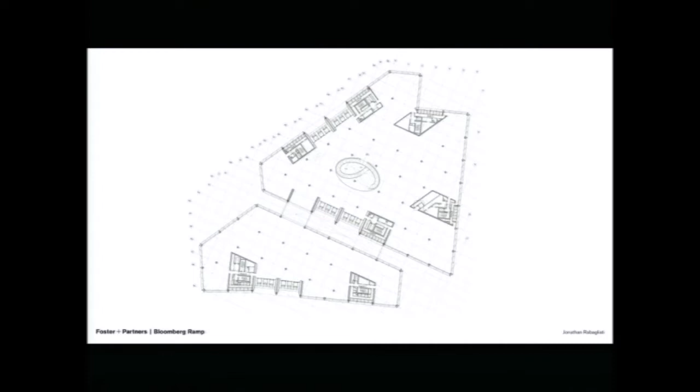Now there's two buildings, a north and a south, and the ramp sits right in the heart of the north building. And this gives you a sense of what it is. It's unique in the sense that on each flight it goes off in a different direction. So it's only by going up 3 flights that it actually returns to the same plan curve. And what you notice as well is that every landing, it's one continuous curvature going all the way up from level 2 right up to level 8.

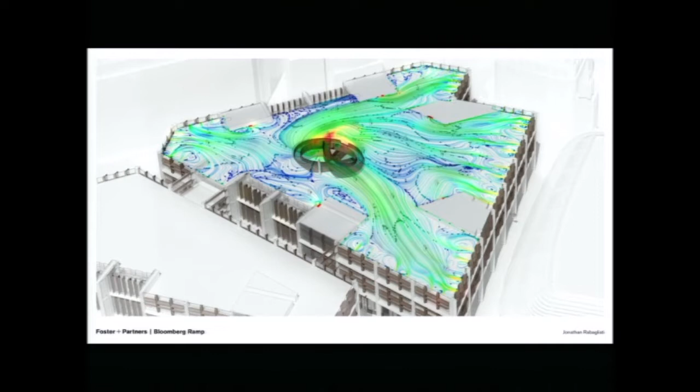And as well as having a function of enabling people to move up and down the building in space, it also is an opportunity in terms of the passive ventilation strategy. The air coming in goes up through the ramp, through the atrium, out of the skylight above.

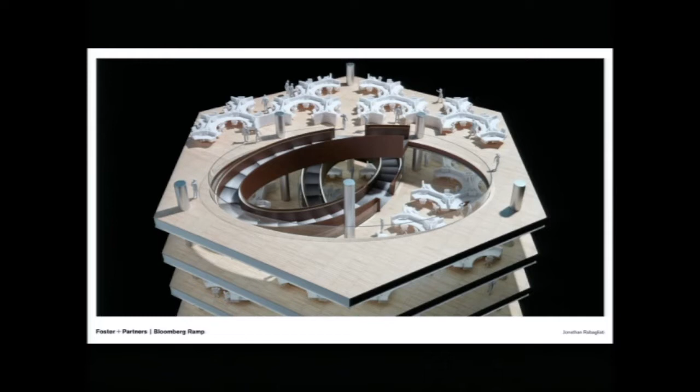And you can see here the relationship between the ramp and the atrium. The atriums hug the ramp, but then open out, so that in terms of the total floor plan of the ramp, the atriums are much smaller per floor, but they rotate 120 degrees each flight as they go up. And then you get to this space which Bloomberg calls the pantry, which is a double height space. And the ramp literally flies out, and a bridge comes across to meet it where the landing is.

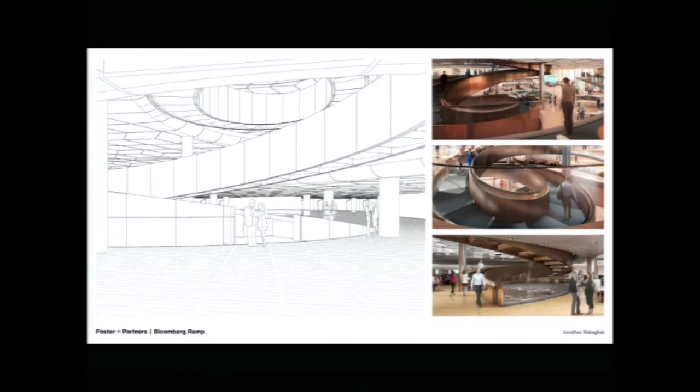And you see the ongoing process in design of the visualizations and the dialogue with the client to really communicate what is actually quite a difficult three-dimensional form to get your head around. This is an animation that I created from the parametric model, and it really shows the versatility of the parametric model, where every frame of this animation is actually a fully detailed 3D surface model of all the cladding of the geometry.

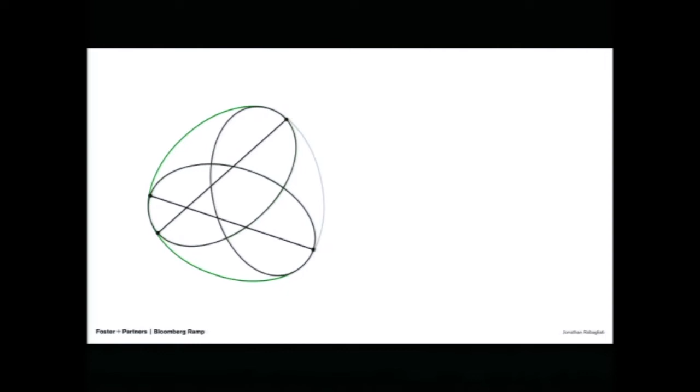And this is actually where I started on the project. So this is 2012, and it's something that really bugged me. I was looking at this and thinking, this isn't right. I don't know what you think about this curvature, but it bugged me. And just to explain what it is, this is 3 ellipses that are tangent together. And what bugged me is that if you draw the central axis of these ellipses, the point of the tightest curvature, you add the second one and the third one, and then you take away the rest. You see that on each leaf, as it were, of the ramp, you've got these 2 points where the curvature is tightest.

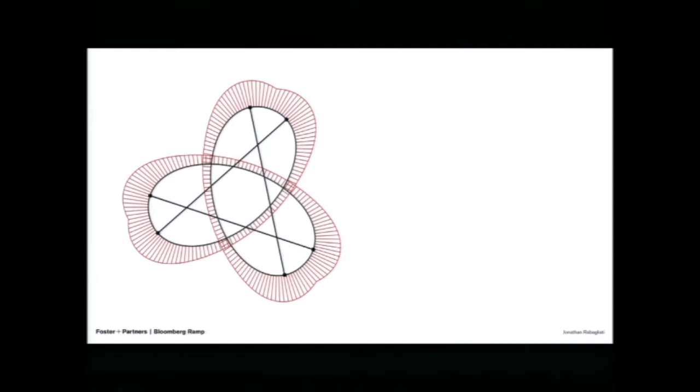And actually, I wanted to define something that was one continuous curve, where as you're walking around, it gets tighter, tighter, tighter, and then opens out again. You don't get these 2 inflection points. So I managed to move from this, which is also the geometry of the skylight above, to this, and this gave me a sigh of relief that I'd got something that I was happy with.

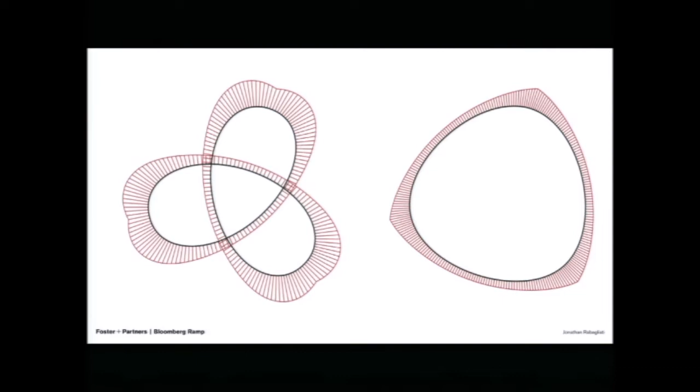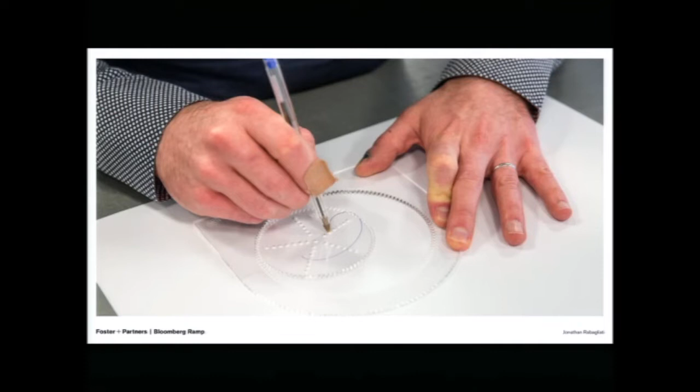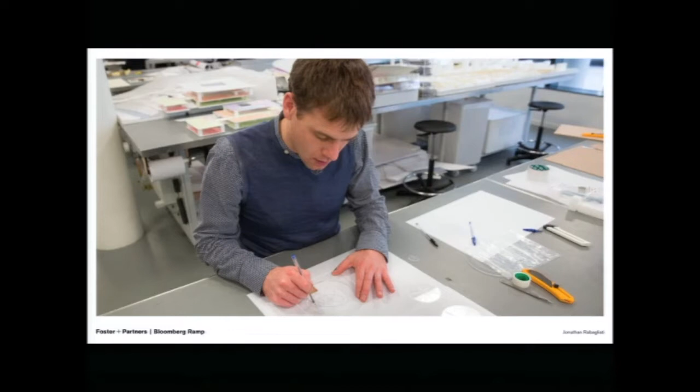Now, actually, this journey was a journey through mathematics, and this is the equation of a hypotrochoid, which is what the ramp is, and the hypotrochoid also defines the skylight above. Now, the mathematical equation might not be familiar to you, but those who grew up in the 60s or 70s are probably familiar with the spirograph, and it's really just a process of rolling one circle around another, and you switch disks, and then you can draw the skylight. And this animation, again, is just a way of explaining that it's starting off with just rolling a circle along a straight line.

So this is a trochoid that it's drawing, and each time the arm of the circle is getting longer and longer until the point where you start bending that line into an arc and gradually curving it around until we finally get to the form, which is the kind of setting out geometry of the ramp.

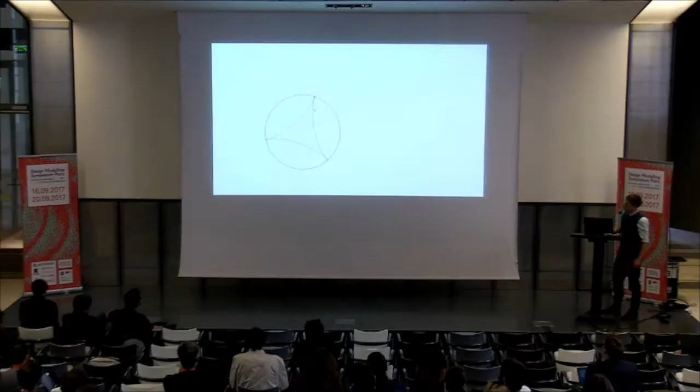But then going beyond that, actually, the relationship between the skylight and the ramp, which are both formed from this same approach to curvature. So that's the skylight and the atrium around the top, around the outside, and then the ramp that draws itself up the center. So that's level 2 right up to level 8, and again all those frames are coming straight from the parametric model.

So this is where I started. This is 2012, and what I'd learned from previous projects is it's the collaborative relationships, and it's that kind of workflow and building between disciplines that's key. And so when I started out, Foster's didn't have a parametric model of this, so I rang up AKT, who are the structural engineers, and said, have you got a parametric model? And they said, yes. So I said, can you send it to me? So this is what I got.

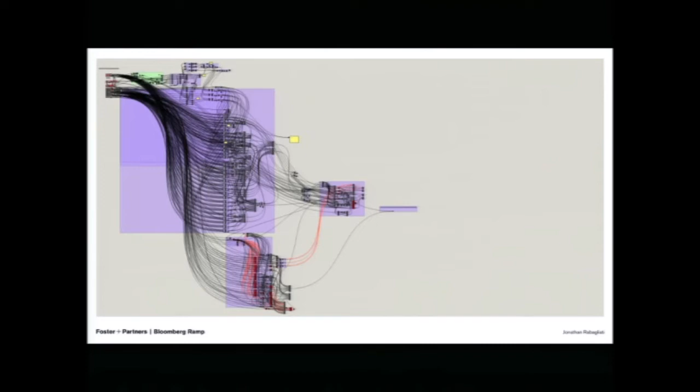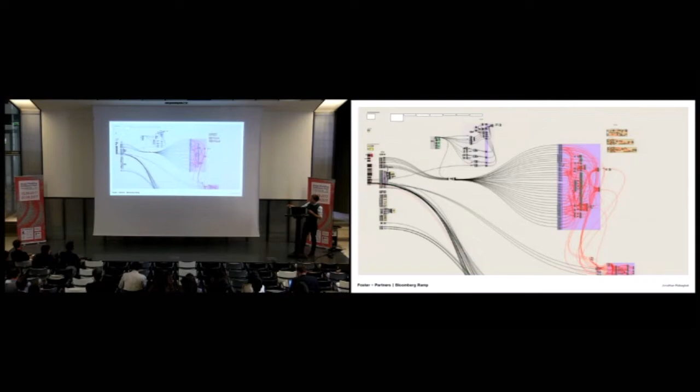And this is basically all the variables on the left, all the parameters, and this top bit was defining the cladding. So this was the part that was owned by me, and the bottom bit was defining the steel structure, which was the domain of AKT. And what you can see here is that the logos of AKT and Foster's actually appeared in the script or in the definition.

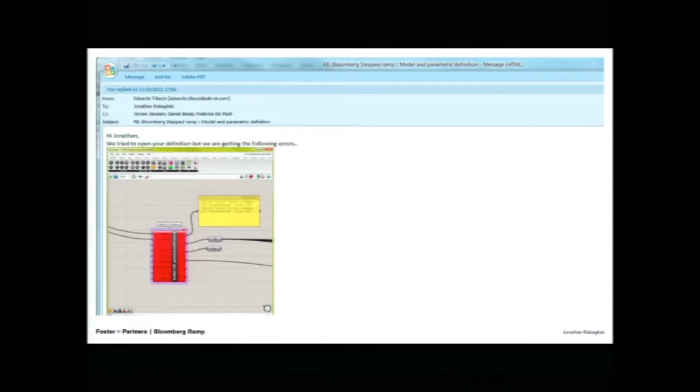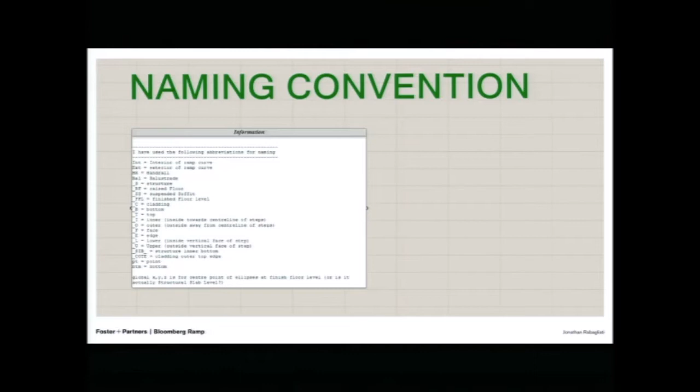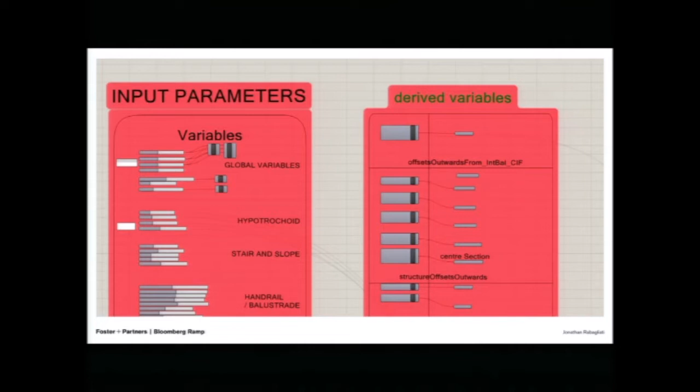But it's this process of collaborating. You see this email from 2012, almost exactly 5 years ago: we tried to open your definition, but we're getting the following errors, which next day was, we tried a different version, and we still get an error. But that process of collaborating is about defining naming conventions. It's agreeing parameters. They were using VB scripting within Grasshopper, so I adopted VB so we could have a common language. And it's really this element of trust. It's this level of skill and dialogue, as well as this rigor of approach.

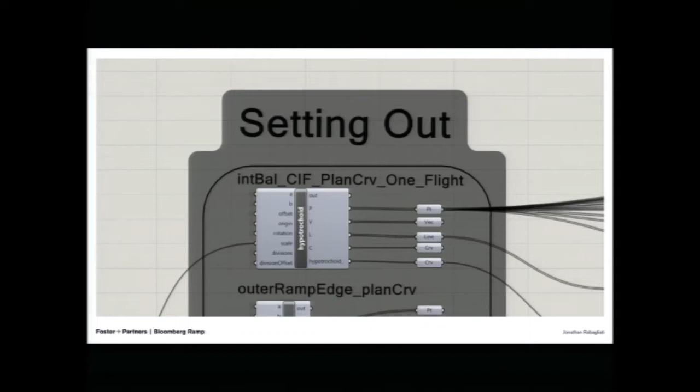So going through there, go right to the middle, and you see the hypotrochoid, which everything is coming out of. And actually, that change in the geometry was facilitated by this magical moment in Grasshopper where you take something out of one thing and plug it back into another. But because their structural model was actually built in the same definition, I could change the geometry, and all their model would update instantly.

So what happened was, rather than spending 3 weeks having coordination meetings updating their model, their model was already built into the analysis model. So that's their analysis, and instead of wasting that time on coordination, they were able to invest it in an exploration in dynamic response factors. So they tested all 96 steps as they're excited, read the results over the full height of the ramp, created a matrix of data that could be processed and analyzed, interrogated the results, and actually got some surprising peak response levels in unexpected places.

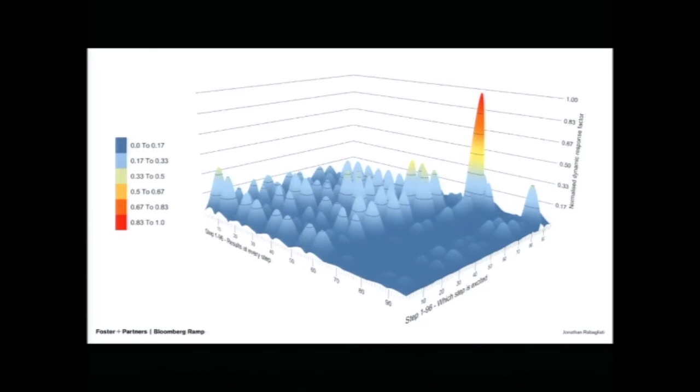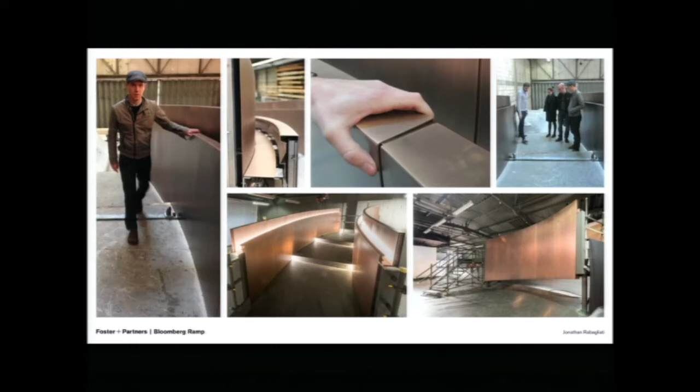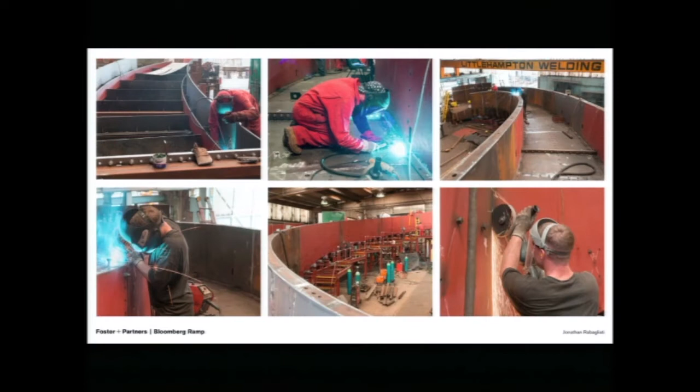Now, while this was going on, the 3D one-to-one prototypes were being made to test the fabricator's capability. These guys in Germany didn't manage to pull it off, so the panels were then commissioned from a company in Japan. And while that was going on, they were already going ahead fabricating the steel. So this is in Littlehampton Welding in the south of England, and you can see literally the scale of this thing. It's vast, and every time we saw the mock-up, we saw this.

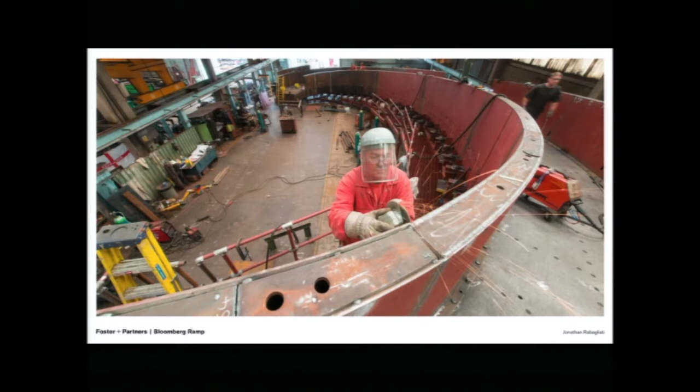You design something, but you're completely taken back by the scale of the thing. And you can see this isn't digitally manufactured in a fab lab. This is men with steel and angle grinders and everything. So this is

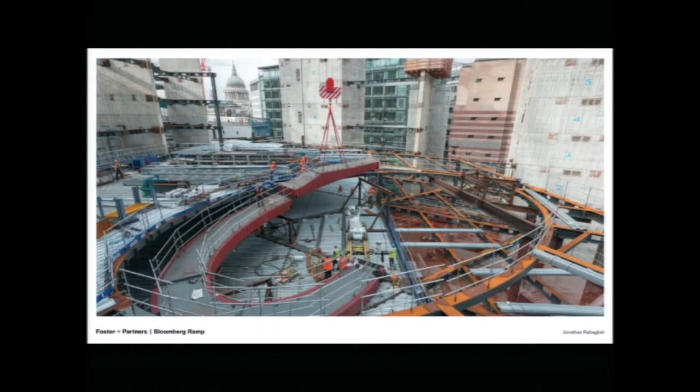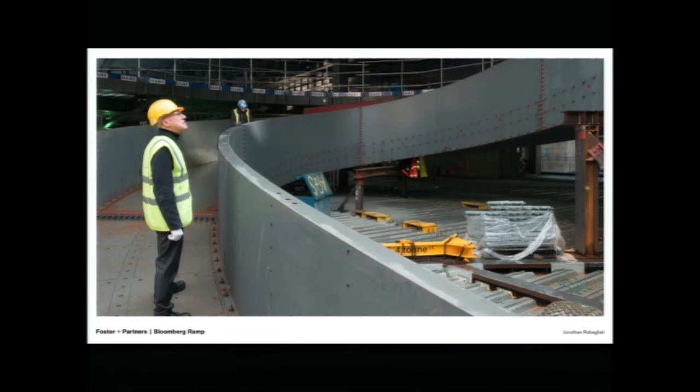2014, yes. So you can see that's where the ramp's going, right in the middle, and it comes onto site, and you can see St Paul's Cathedral just overlooking the building site. Because it's bounded by the City of London, there's nowhere to store this, so the ramp structure was stored in situ, and gradually it went up floor by floor. And you can see Norman came along to keep an eye on the proceedings.

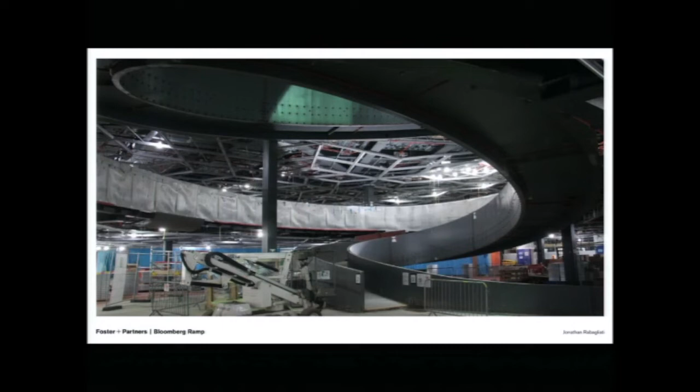And here you see that 120 degree twist as it goes up. So literally, as the building was built, the ramp came along and was propped up on these goalposts, as you see. And then once the floors had been finished and the concrete poured and the rest of the building settled, then it was actually bolted into the superstructure. So that's where it starts in level 2, going up to this double height space and up into the skylight above. So in terms of sharing data and logics with the structural engineers, AKT, we actually shared that parametric definition.

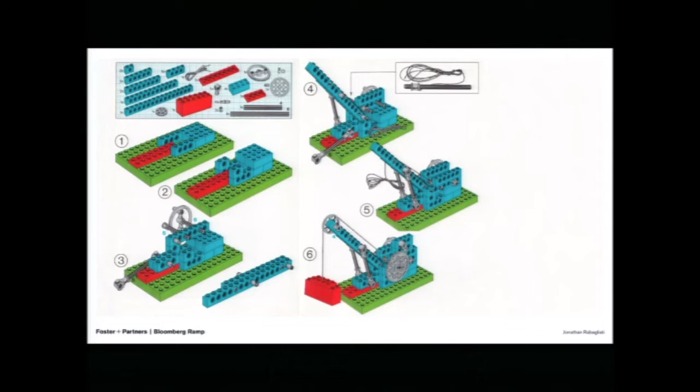Now, in terms of sharing data with the contractors, we used this approach, which is the kind of Lego instructions. So what we did is we encapsulated all the geometry, and because it's defined by a series of mathematical equations, we could do that. And so this is the list of all the parameters for the whole ramp. And then we had literally, I think there were 93 steps that we could go through with a series of checking points.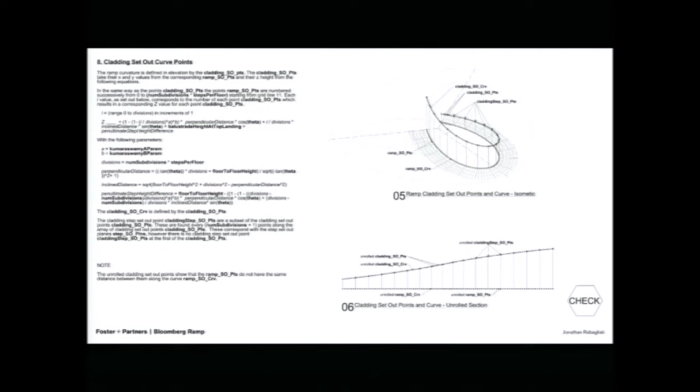And the other thing, I've talked about the plan curve, but here, this is the curve in profile. And again, I turned to mathematical equations, but didn't just rely on the maths per se; we put it into the VR because we wanted something that wasn't mathematically optimized, but that worked optically. So you can see here, you've got the landing. In this case, the curve of the handrail actually just travels right through where the landing is.

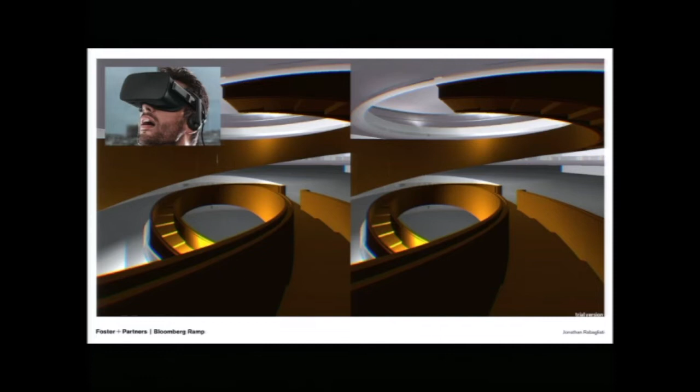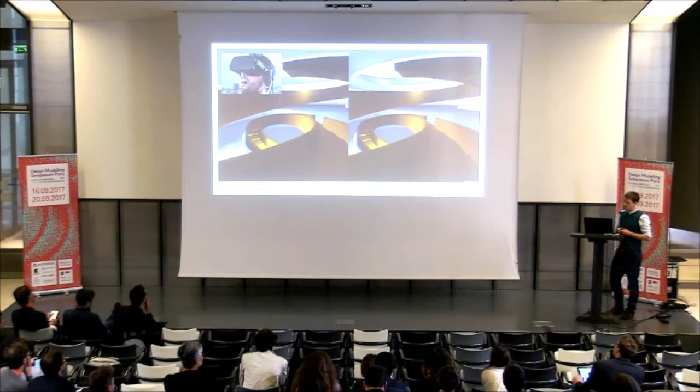So in order to reduce the height at the top, we subtly curved the geometry of the stair in a sort of S shape. But we didn't want anyone to see that. So we're playing off the curvature in plan with this slight S-curve in profile. And it's really looking at 2 different options in VR and seeing where we can have the maximum S-curve that you actually can't see at all.

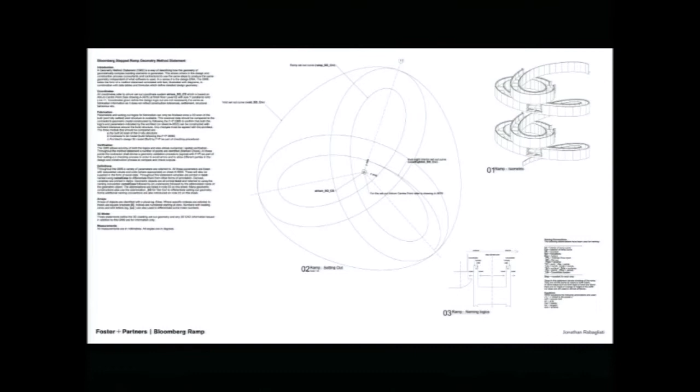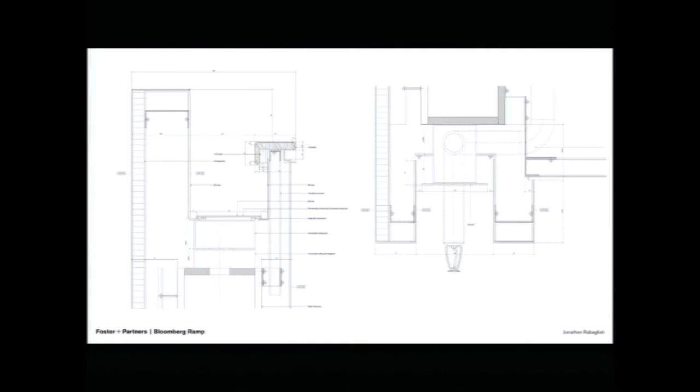And then these are the complementary architect's drawings that turned into these fully fleshed out drawings with bolts and everything from the contractor. Now, the next step was

illustrated by this, which is not a photo, and what's amazing about this is it's in a way the only chance you get to see the ramp in its entirety, because there were actually 2 point cloud scans done of the ramp, because with a shape this complex, how do you know whether it's in the right place or not? And so it was scanned. You can see here some of the goalposts that were used to support it.

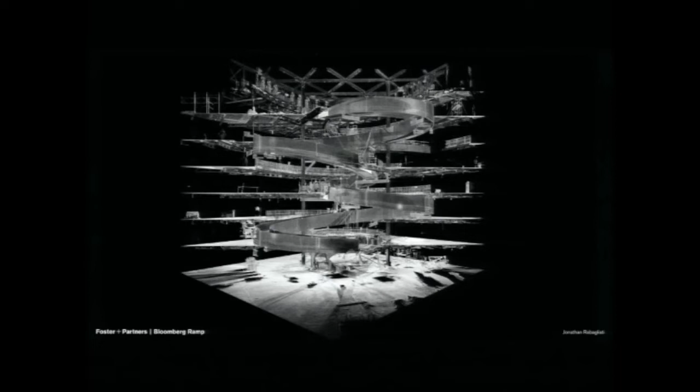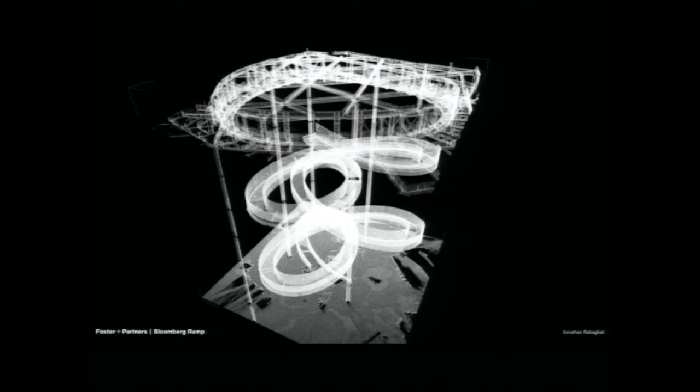So this was the scan before it was welded into place, and then this is the scan after it had been welded into place. And these were guys who were used to scanning nuclear submarines or small machine parts, taking on this vast job where I think we had a billion points in this point cloud, which was then decimated down to 24 million, which they gave to me.

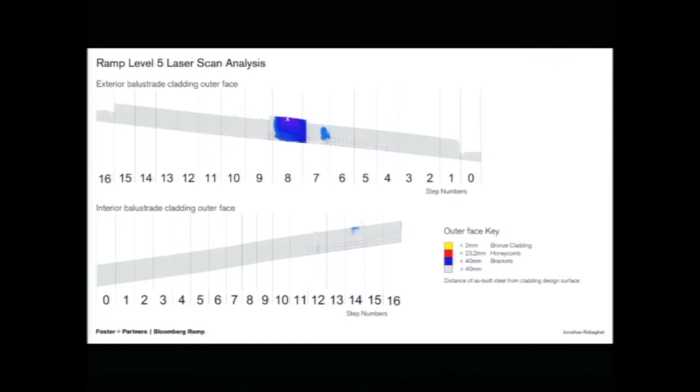The red was if it was in the zone of where the honeycomb, and then the yellow actually would have been protruding through the bronze. So it gave us an indication of kind of where the issues were and what we had to do.

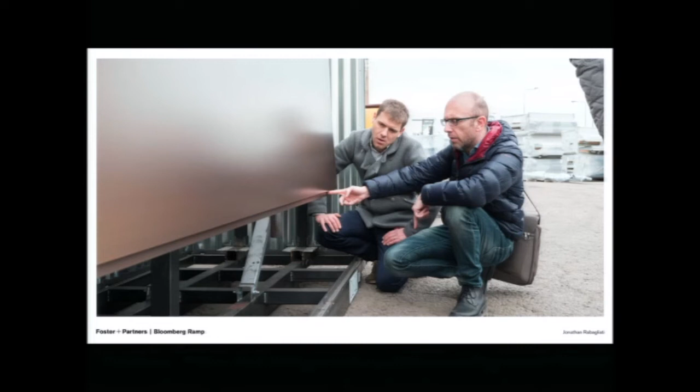Now, while this was going on, the first shipment of panels came back from Japan. So this is Tilbury Docks in the Thames, and we were inspecting the quality of these. And they're really exceptional in the finish. So it meant we had a dilemma, because the steel was slightly out of tolerance, we're talking about 24 mil at a maximum. But it meant that the cladding panels couldn't fit on in this pure theoretical design geometry position.

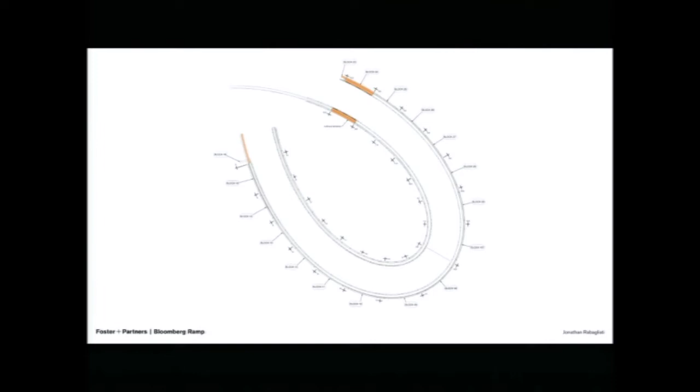So the next exercise was how can we use that scan data to reset out those panels so that they fit precisely over the steel. And this was this exercise, and because there's 10 mil gaps between each panel, we could shift these blocks of panels subtly so that you might go down to 9 one side or up to 11. And so we went through a series of iterations of just jiggling these panels a little bit in order to fit over the structure.

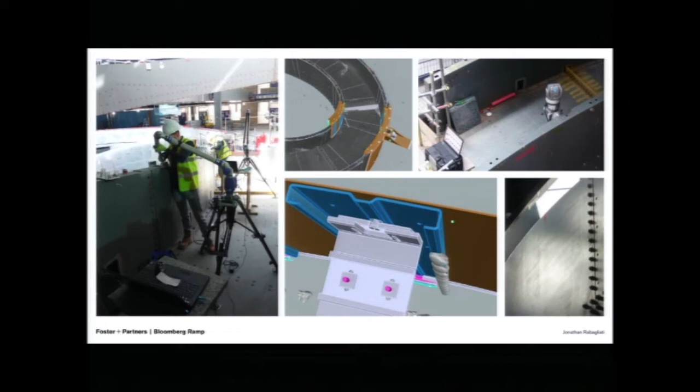So using some very sophisticated measuring techniques. You have here a laser tracker that was used to direct a handheld target to get the position of the top brackets within sub-millimeter precision. And here you have the solid model from the contractor versus the key protruding parts of these bolts from the steel structure that were used as a kind of clash detection in order to get the position as tight as it could to the design geometry.

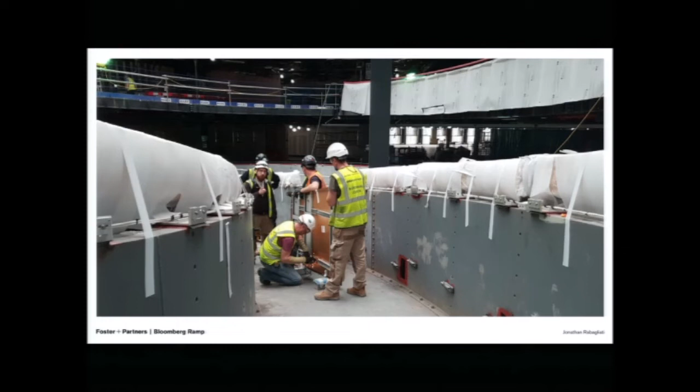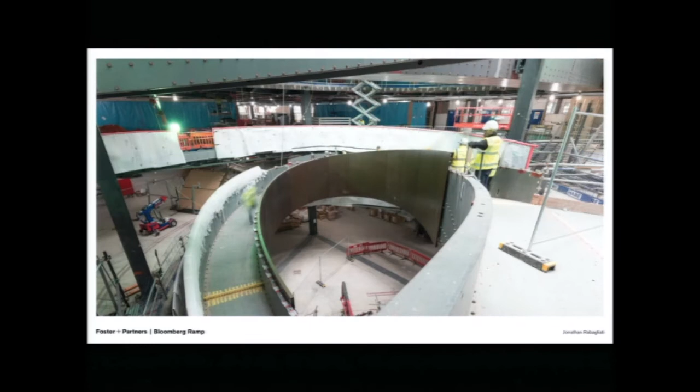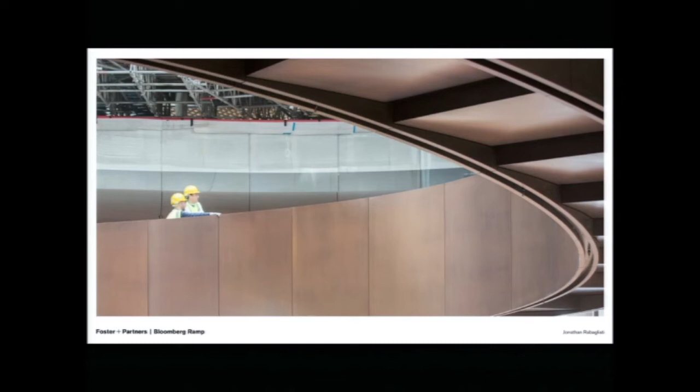So there you see these brackets that the cladding panels are literally hung on. And as soon as there's a panel ready to go on the brackets, and as soon as these things were hung, they were covered by this. It looked like a kind of snow sculpture or something. These things had come all the way from Japan, and they were so expensive that they were afraid that anyone would dent and scratch them. So we had moments where we came for a snagging inspection, and then the next time we came, they'd all be covered up. So we got these glimpses of it.

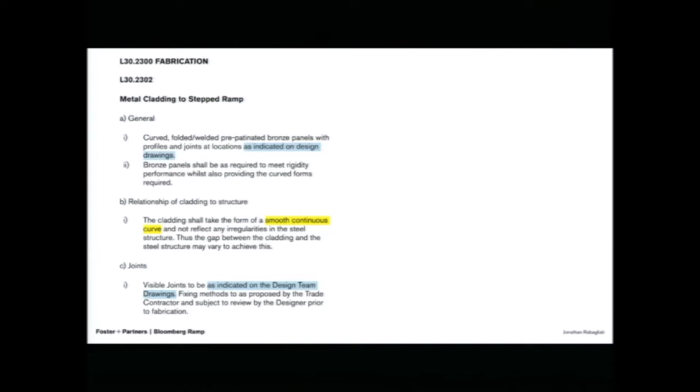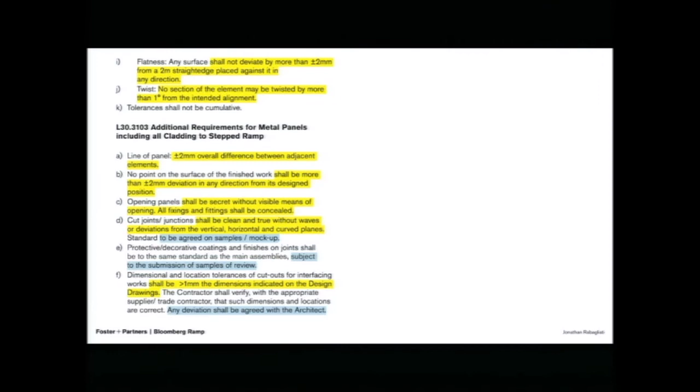And actually, what's interesting is you're talking about data, and we had all these 3D models, these instructions, and there still were some architectural drawings, but the other key thing was these specifications, and some of these numbers that were defined were actually the last line of defense for us to snag and to measure and to push the installers to make some final adjustments.

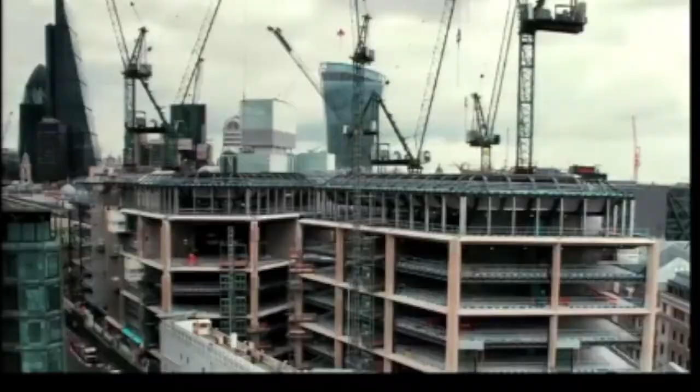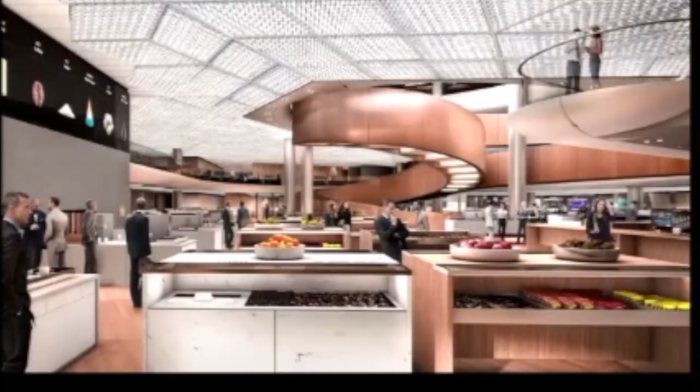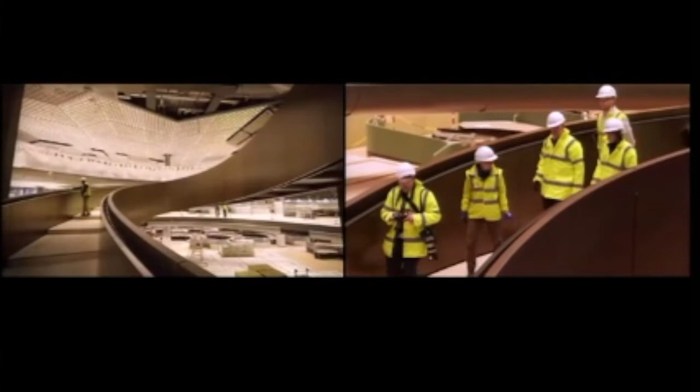So this is what's there probably a few months ago. So you're seeing the thing taking shape, and I'm just going to end on this video, which is available online from Bloomberg London's website, which gives you a little glimpse into the building as it comes to completion. So that's the view of St Paul's that you can see from the building, and that's Michael Bloomberg walking down the ramp itself. And the next shot of him, you'll see in a moment, him sitting in front proudly, sharing his philosophy.